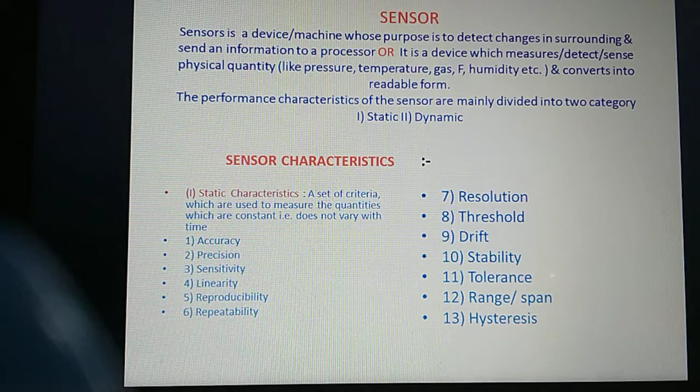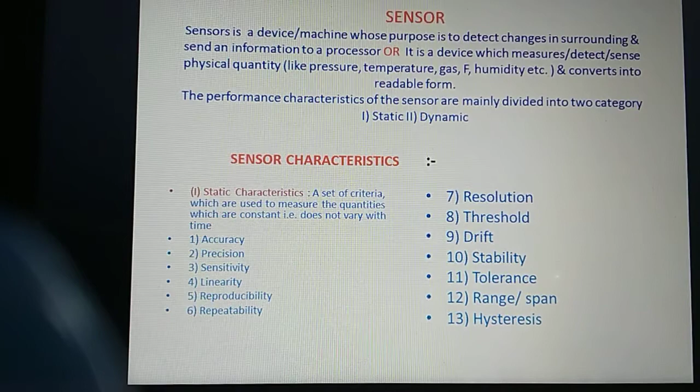Hey, good morning, students. Let us start today the next topic of the first module, and that is sensor. Last time we studied signal analysis in two domains, time domain and frequency domain, in the first lecture. Before starting the topic of sensor, let me recap the last lecture.

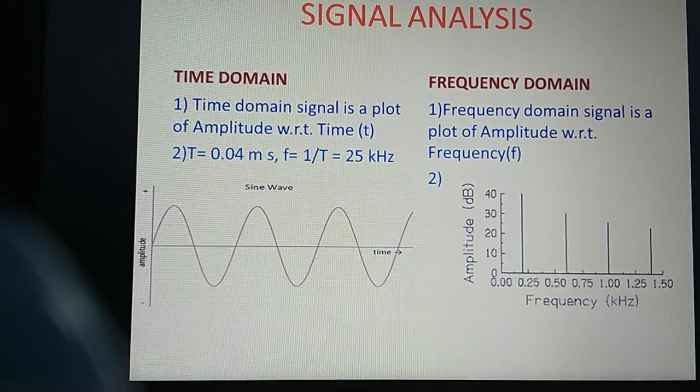In signal analysis, we studied how to differentiate the signal in time domain and frequency domain, and how the signal becomes less complex, or the complexity of the signal is reduced, in frequency domain.

The next topic we studied is signal to noise ratio, and we defined what is meant by noise. Noise is an unwanted signal or disturbance existing in the signal. Signal to noise ratio is a ratio of average signal power to average noise power, and hence can be written as signal power divided by noise power.

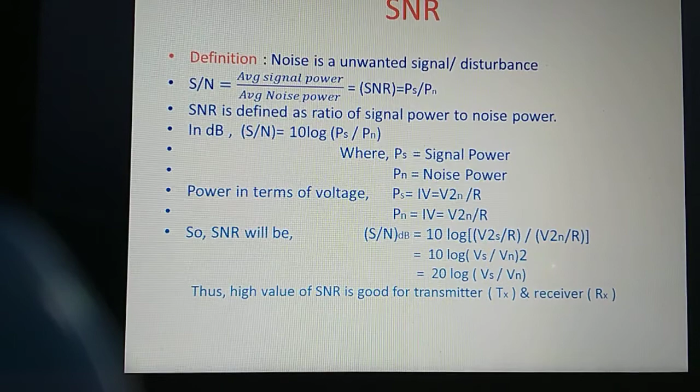We also wrote signal to noise ratio in terms of voltage, and if converted into decibels, signal to noise ratio equals 10 log of signal power divided by noise power. Then we converted it in terms of voltage, so signal to noise ratio in decibels in terms of voltage comes out to be 20 log of signal voltage divided by noise voltage. Finally, we studied that a high value of signal to noise ratio is good for transmitter and receiver.

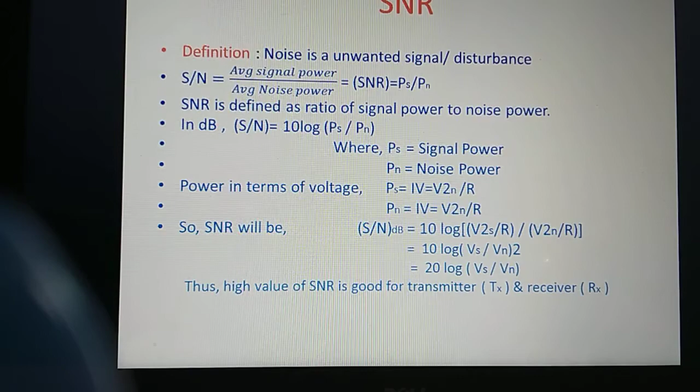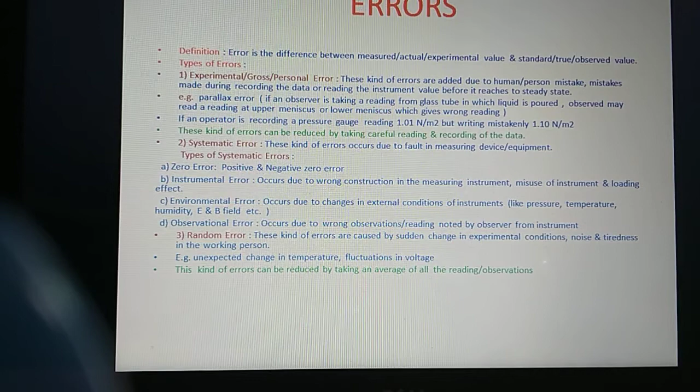After that we studied what is meant by errors, and there are three different types of error. Error is nothing but the difference between measured value and observed value, or true value.

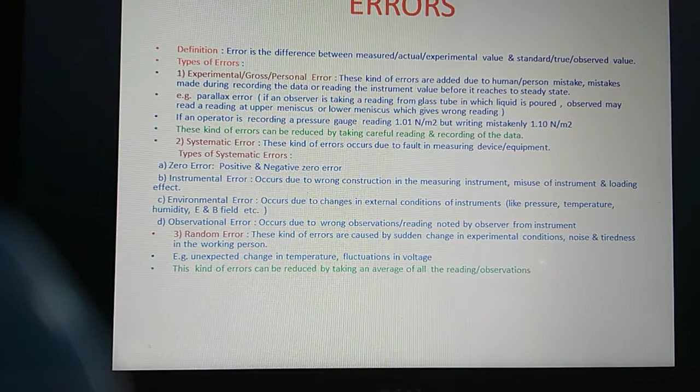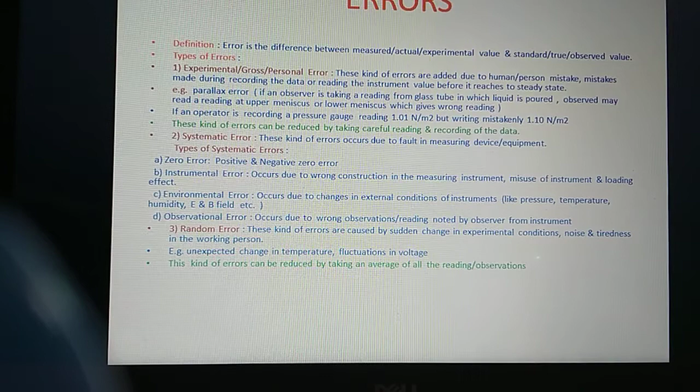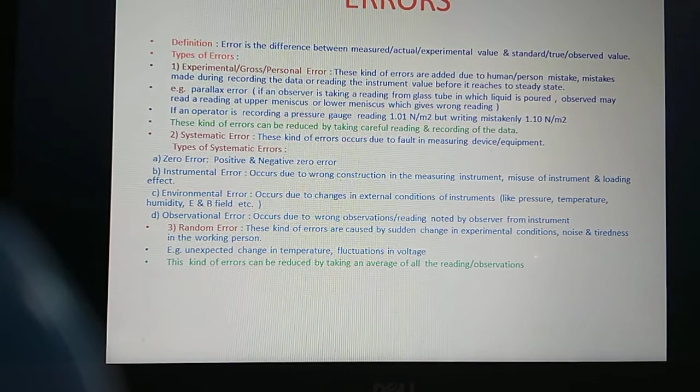The first type of error is called experimental error, or gross error, or personal error. We studied how these experimental or personal errors are introduced while doing an experiment, with an example, and how we can reduce personal errors.

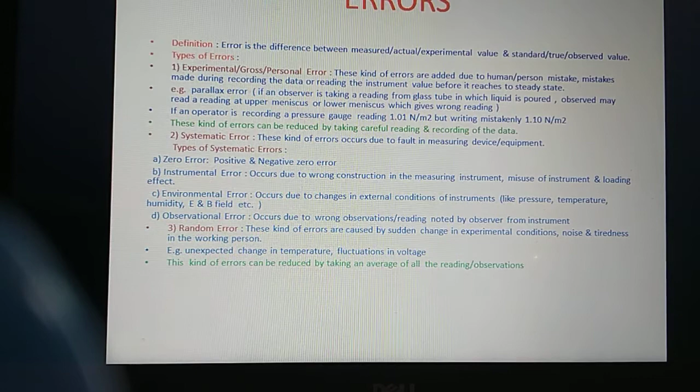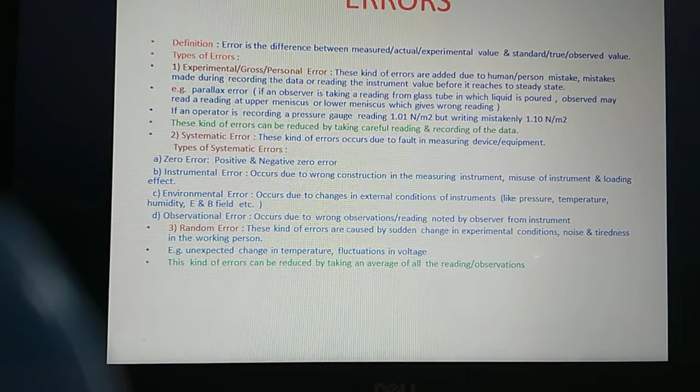After that we studied three to four types of systematic error. The first type is zero error, of two kinds, positive zero error and negative zero error. The second type of systematic error is instrumental error. The third is environmental error, and the fourth is observational error.

We studied how these errors occur during an observation, and the last type of error we studied is random error, and how to reduce that random error.

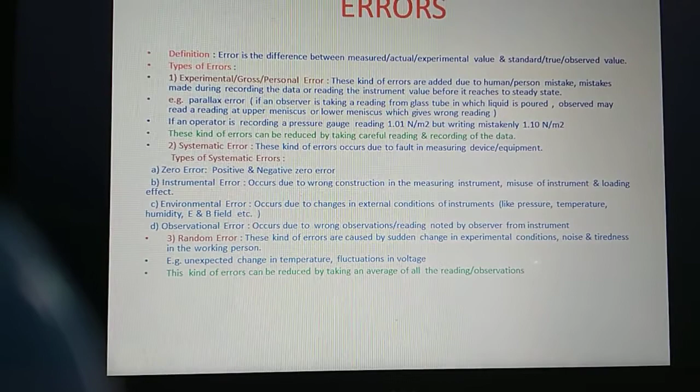After that, three different types of errors we studied: absolute error, relative error and percentage error. I hope you have understood these types also very well.

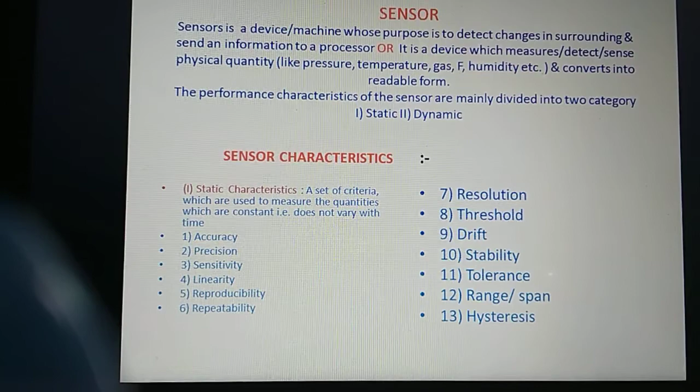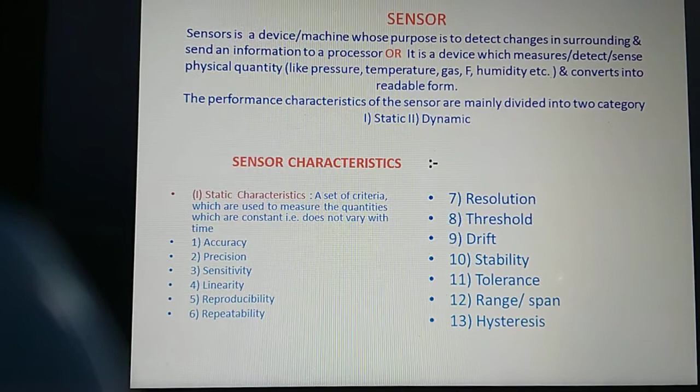Now let's go ahead with sensor. What do you mean by sensor? You have been using these sensors in your day-to-day life. Whenever you visit various malls, you will find a sensor at the entry. Or anywhere you go, you can find sensors many times.

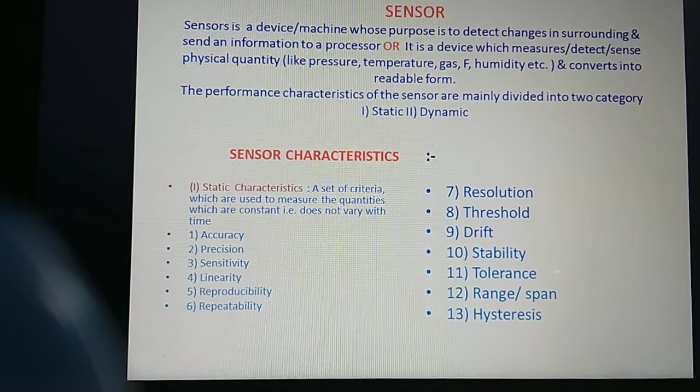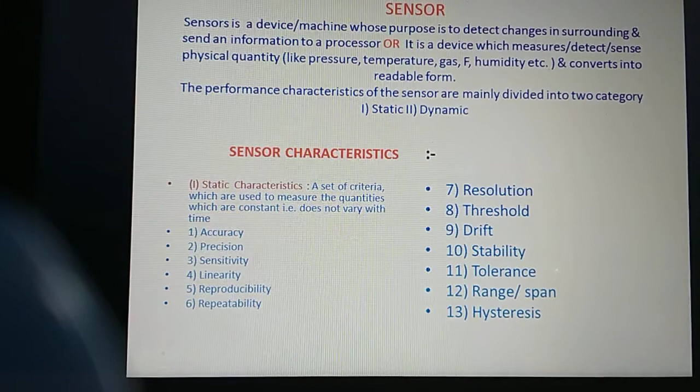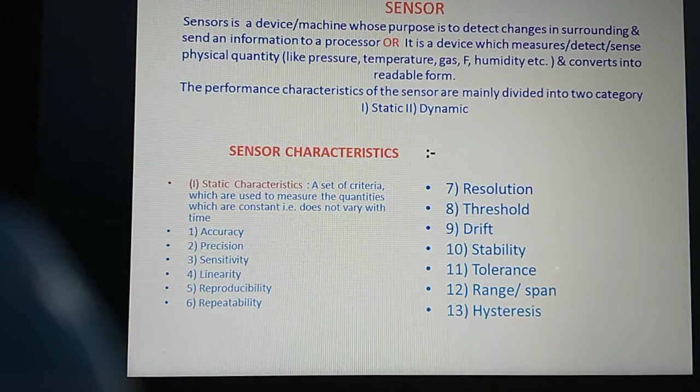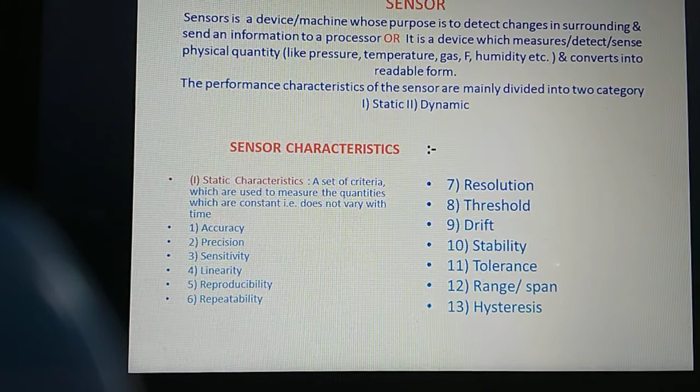A sensor is a device or machine whose main purpose is to detect changes in its surrounding, and once it detects the changes, the sensor sends that information to the processor. Or, it is a device which measures, detects or senses a physical quantity like pressure, temperature, gas, humidity, force, fluid, etc. There are various physical quantities which can be sensed using sensors, and it converts that detected or sensed physical quantity into a readable form. This is called a sensor.

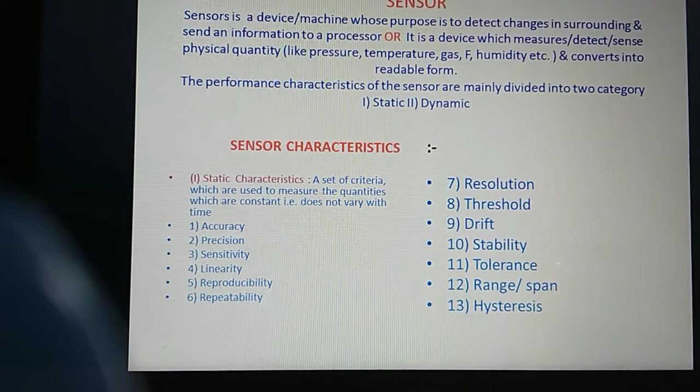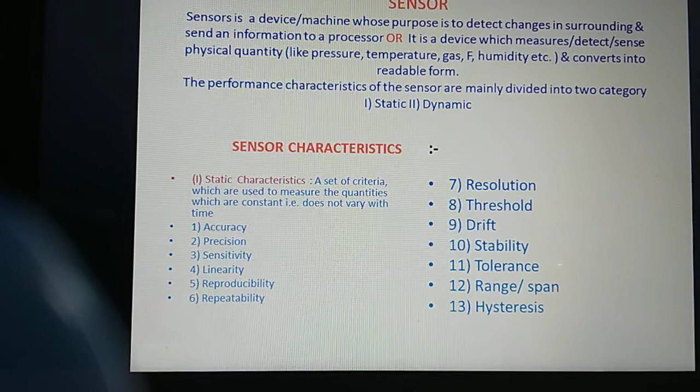Now, these sensors are used in various forms. The performance characteristics of sensors are mainly divided into two categories: the first is static performance characteristics of a sensor, and the second is dynamic performance characteristics of the sensor.

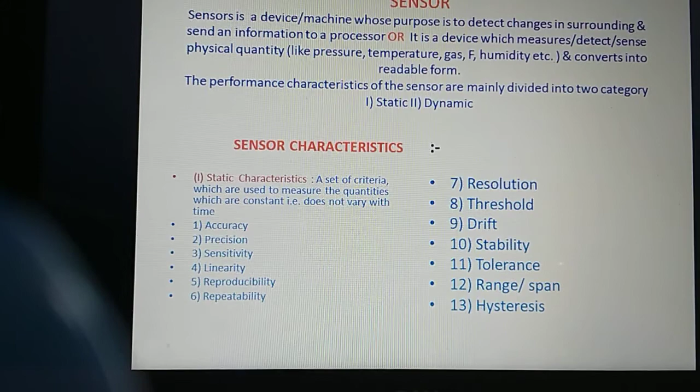Now, what do we mean by static performance characteristics of a sensor? It is nothing but a set of criteria which are used to measure a quantity which is constant, meaning it doesn't vary with respect to time. Those kinds of characteristics are called static performance characteristics of a sensor.

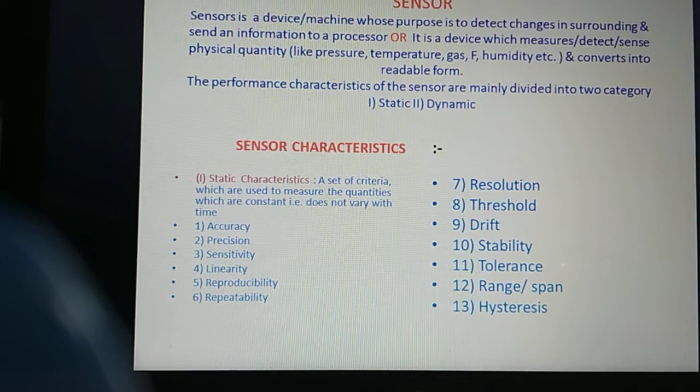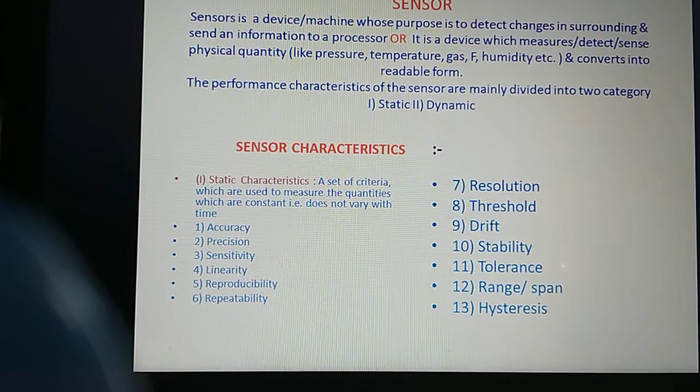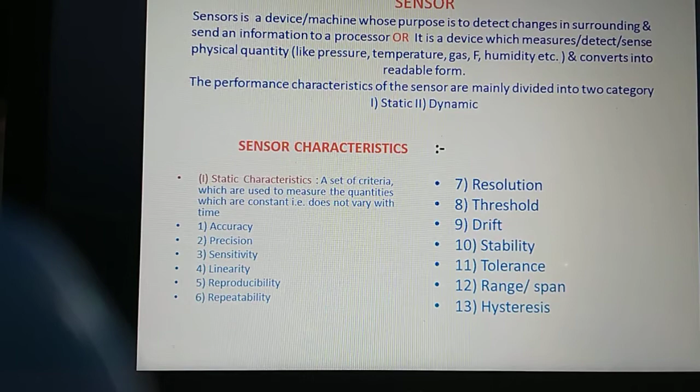There are total 13 static characteristics for a sensor. Let me list all those 13. The first is accuracy, second is precision, third is sensitivity, fourth is linearity, fifth is reproducibility, sixth is repeatability, seventh is resolution, eighth is threshold, ninth is drift, 10th is stability, 11th is tolerance, 12th is range or span, and 13th is hysteresis. Being a PG student, you are already familiar with its various names; by its name you can judge its characteristics.

Let's go for the very first static characteristic of a sensor, and it is accuracy. You have been using this word very commonly, and precisely you have studied also what is meant by accuracy in 11th, 12th standard or in UG also. Now, what do you mean by accuracy or accurate? If your answer to any problem is close to your known answer, then that answer is said to be very accurate.

If it is exactly equal, then it is an accurate answer. We commonly use this word, and the same thing is used in case of a sensor's accuracy here also.

Now let us study what is the accuracy of a sensor. Accuracy is the degree of closeness of a measured or calculated value to its actual value, or a standard value, or a true value. Once the sensor is designed and manufactured, that means it has a standard value or actual value.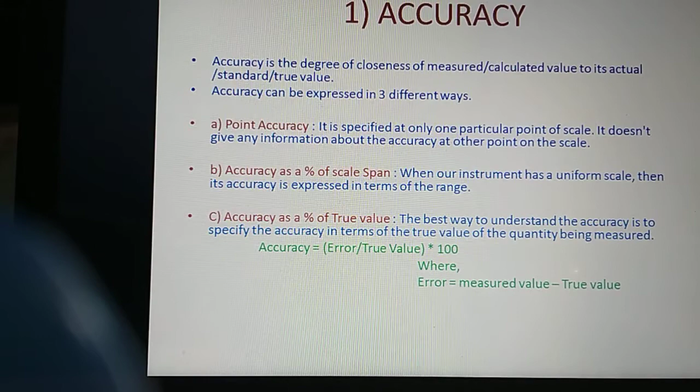And once the sensor measures a particular physical quantity, and if that measured value is very close to the actual value, then its measurement is called very accurate. Therefore we can say accuracy is the degree of closeness of a measured value or a calculated value.

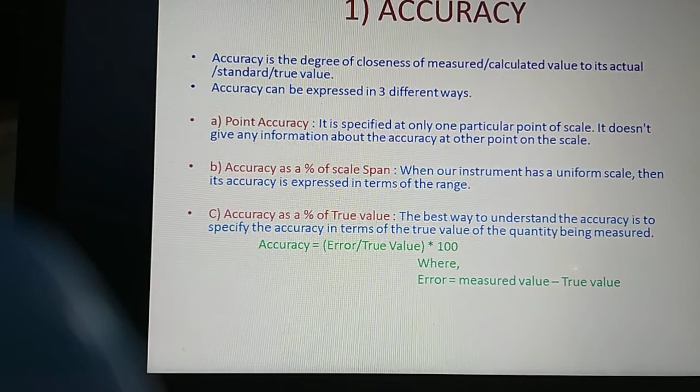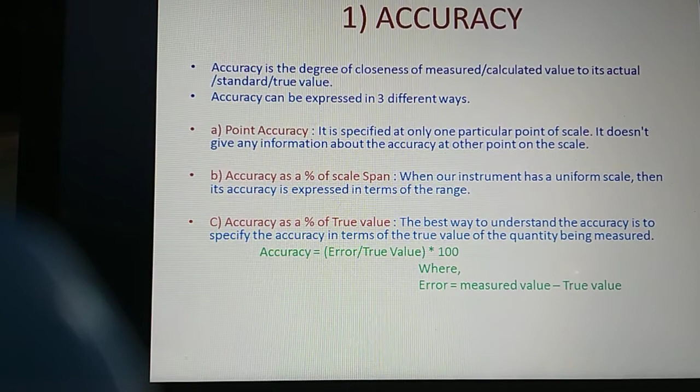This accuracy in case of a sensor is expressed in three different ways. The first way of expressing the accuracy of a sensor is the point accuracy, and this point accuracy is specified at only one particular point of the scale, and it doesn't give any information about the accuracy of other points on the scale.

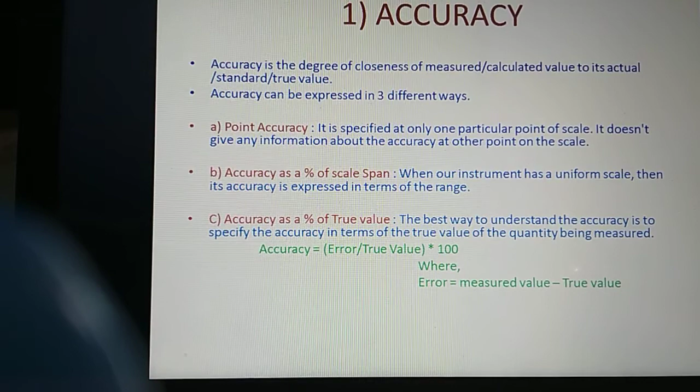The other way of expressing the accuracy of a sensor is accuracy as a percent of scale span. When an instrument has a uniform scale, its accuracy is expressed in terms of a range. Suppose you are having an ammeter whose range is 0 to 100 ampere, then the scale span is from 0 to 100. That's the meaning of accuracy as a percent of the scale span.

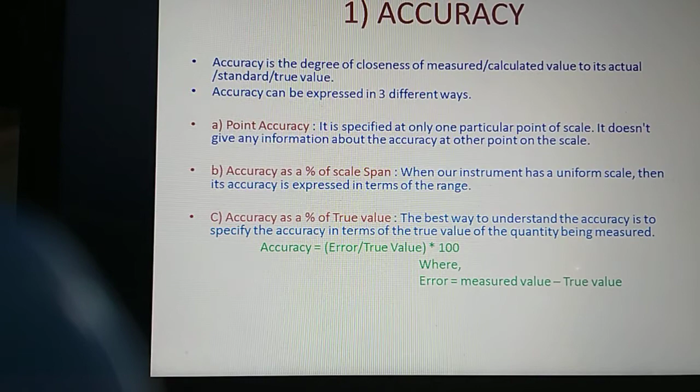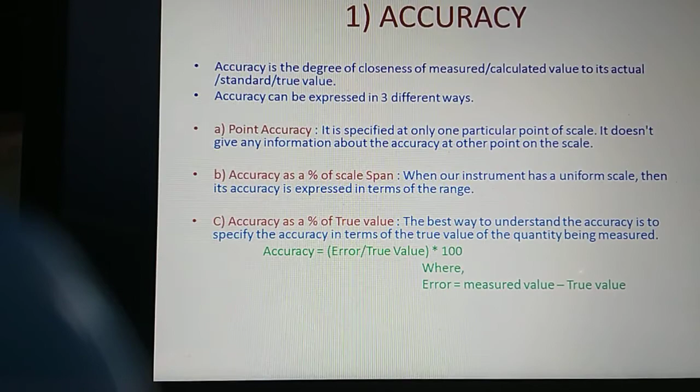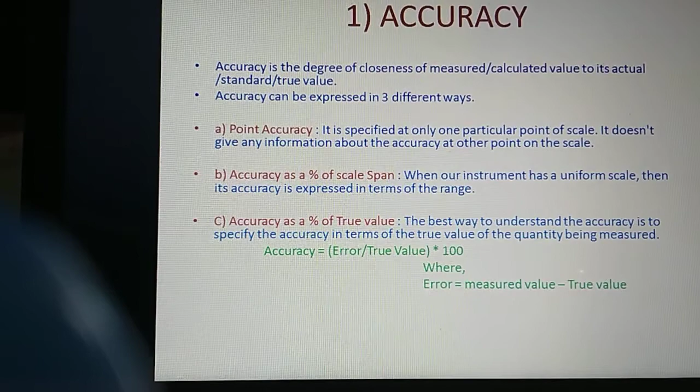Now the third way of expressing the accuracy of a sensor is accuracy as a percent of true value. The best way to understand accuracy is to specify it in terms of a true value of the quantity being measured, and therefore accuracy equals error divided by true value into 100. That gives you the accuracy, where error is the mod of measured value minus true value, which we have already studied in the error topic.

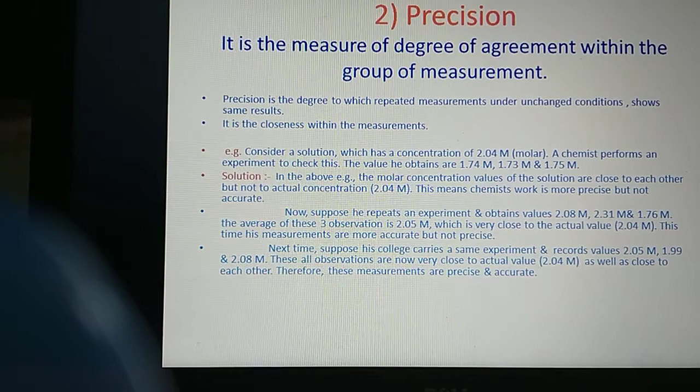Now let's move to the next static characteristic of a sensor, which is precision. We know precision is the measure of degree of agreement within a group of measurements. Let me explain a bit more clearly, and we'll study an example so you can understand precision clearly. Precision is the degree to which repeated measurements under unchanged conditions show the same results, and this precision is the closeness within the measurements.

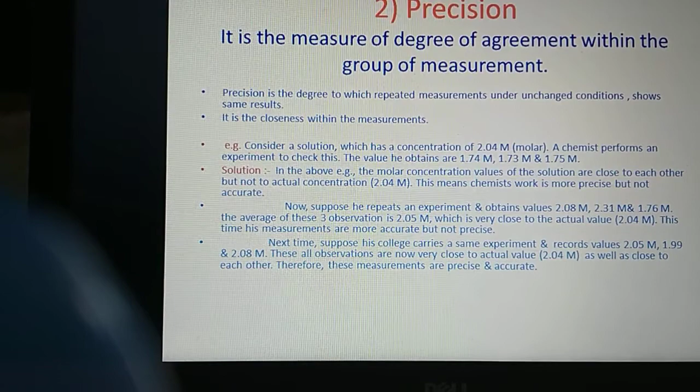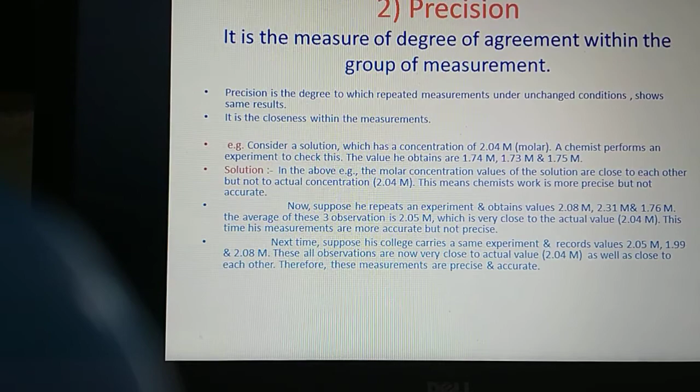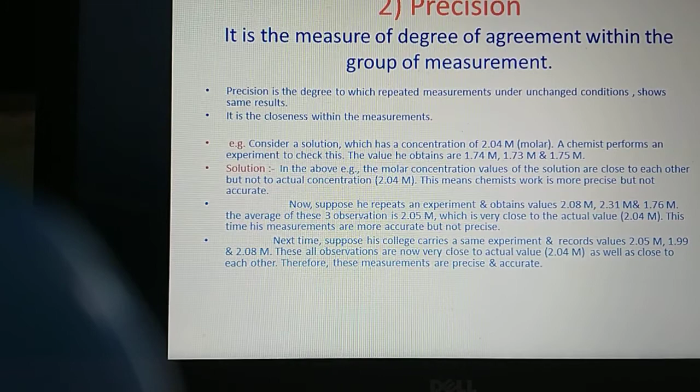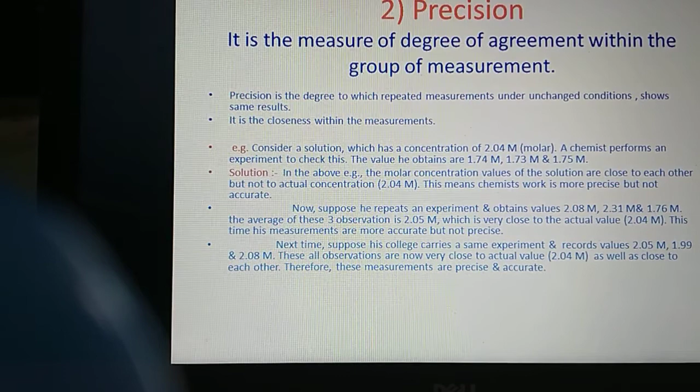Now let us consider an example. Suppose you have a solution with a concentration of 2.04 molar. Now if a chemist performs an experiment to check whether the concentration's molarity is 2.04 or not, the values he obtains after performing the experiment are 1.74 molar, 1.73 molar, and 1.75 molar.

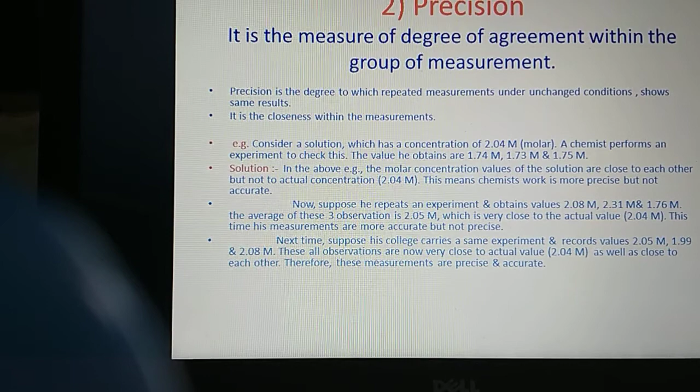Now in this example we have to understand the difference between accuracy and precision. The molar concentration values of the solutions are close to each other: 1.74, 1.73, 1.75. All three observed values by the chemist are very close to each other.

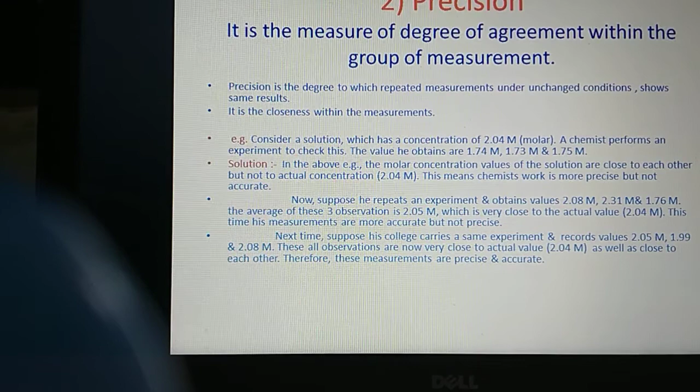But those are not close to the actual concentration mentioned in the problem, which is 2.04 molar, somewhat far away from the observed readings. This means the chemist's work is more precise but not accurate, because the values observed are somewhat far away from 2.04.

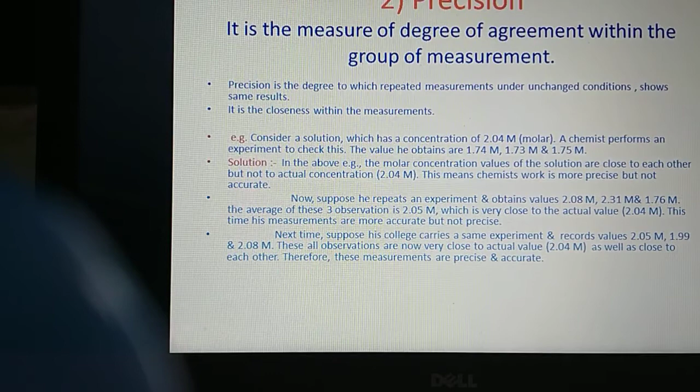But all three measured values are very close to each other: 1.74, 1.73, 1.75, which means those values are very precise. That means the chemist's work is precise but not accurate.

Now let us suppose another case of the same example. Suppose the same chemist repeats the experiment and obtains the concentration values 2.08 molar, 2.31 molar, and 1.76 molar. The average of these three observations is 2.05 molar.

This average of the observations, 2.05 molar, is very close now to the actual value, which is 2.04 molar. Since 2.04 and 2.05 are very close to each other, this measurement, performed the second time by the chemist, is more accurate but not precise.

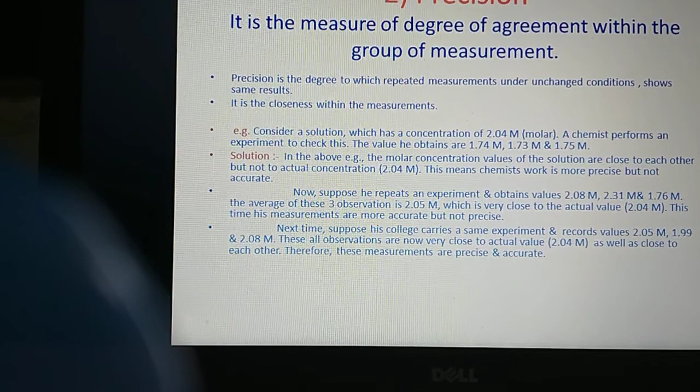Why is it not precise now? Because the observed three readings, 2.08, 2.31, and 1.76, are not close to the original value of 2.04. But the average calculated, 2.05, is very close to the actual concentration, and hence it is more accurate but not precise.

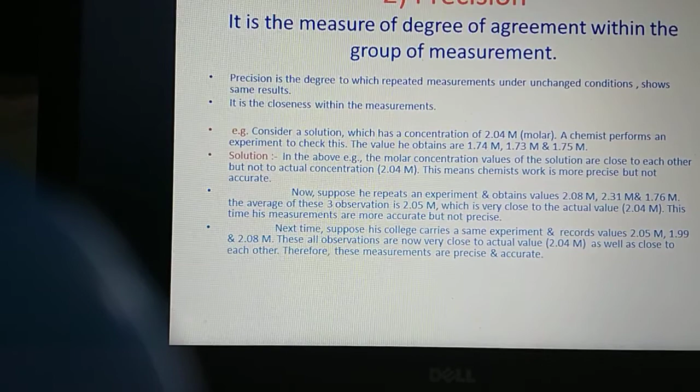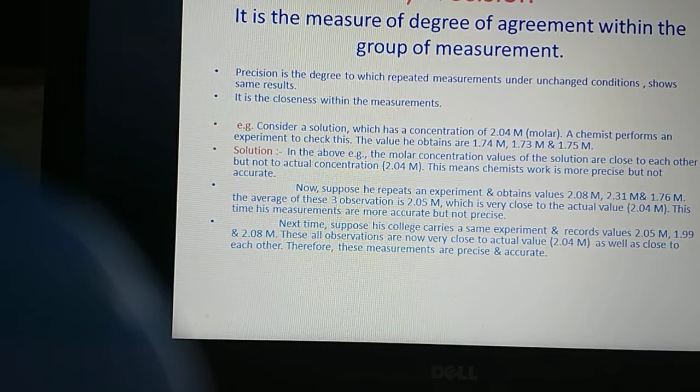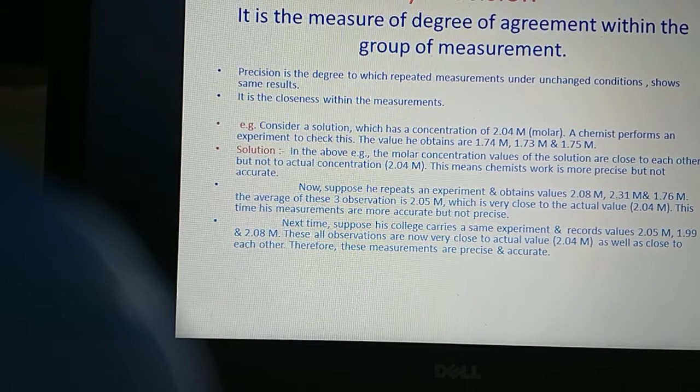Now let's try to understand more clearly by considering one more case. Next, the chemist performs the experiment with the help of his colleague and records the concentration values 2.05 molar, 1.99 molar, and 2.08 molar. Now all three observations are very close to the actual value 2.04 molar as well as close to each other.

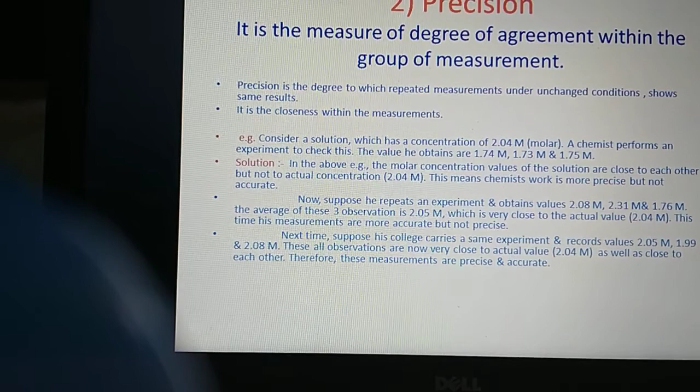Therefore, the third case is more precise than the earlier two, as well as more accurate, because all three readings are close to 2.04 molar and also very close to each other. Therefore, the third case, in which the chemist performs the experiment with the help of his colleague, is more accurate and more precise.

Hope you have understood the difference between preciseness and accuracy with this example. Now let us go ahead for the next static characteristic of the sensor, which is sensitivity.

And what do you mean by sensitivity? We all know by common sense you can easily judge what is meant by sensitivity. We are using this word commonly. You are very sensitive, that means you are giving a very quick response to whatever you receive from the next person or from your friends.

Like that, the meaning of sensitivity for the sensor is also the same. The sensitivity of the sensor is defined as the quickest response of an instrument to a smallest change in the measured variable or any physical quantity. Sensitivity equals the ratio of change in output of an instrument to the change in value of the quantity to be measured, or sensitivity equals change in output divided by change in input. Now if the response curve is linear, then sensitivity is said to be good.

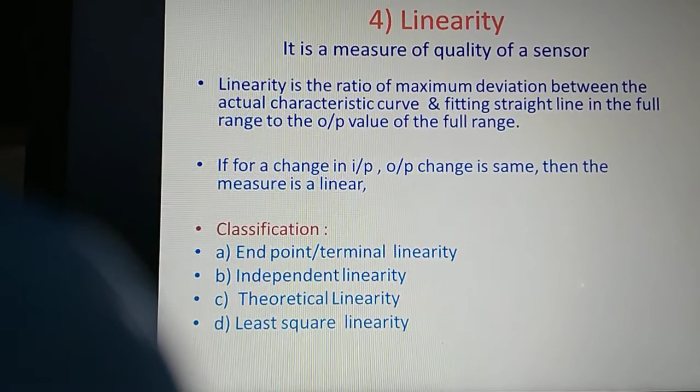Now let's go for the next static characteristic of the sensor, which is linearity. What do you mean by linearity? This linearity of the sensor is a measure of the quality of the sensor.

Linearity is the ratio of maximum deviation between the actual characteristic curve and the fitting straight line in the full range, to the output value of the full range. If for a change in input the output change is the same, then the measure is linear, like a linear curve or linear graph. If the input and outputs correspond in this way, then the measure is said to be linear.

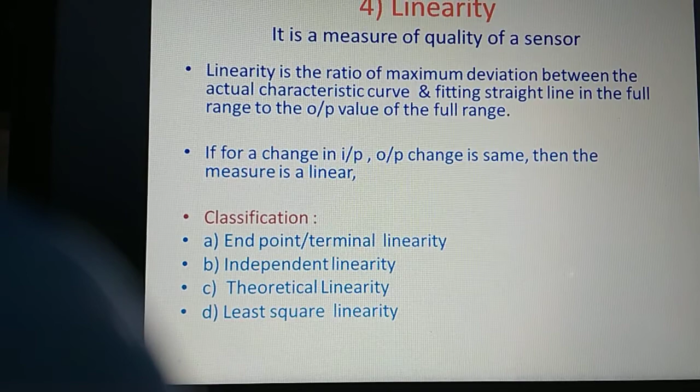This linearity of the sensor is classified into 4 different ways, which I have mentioned on the screen. The first classification is endpoint or terminal linearity. Second is independent linearity. Third is theoretical linearity, and fourth is least square linearity. These are the four different ways of classification of linearity.

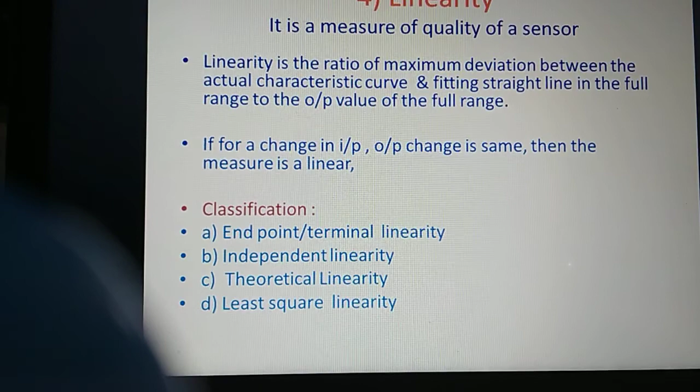We are not going into the details of classification of linearity. You can read out the classification of linearity yourself. That is not important as far as your exam is concerned. Now the next static characteristic of the sensor is repeatability.

What is meant by this repeatability? It is like repeating the observations or measurements of an experiment, called repeatability. The same thing applies here in case of a sensor.

Repeatability of a sensor is its ability to reproduce a group of measurements. That means the sensor gives you again various measurements, or a group of measurements, of the same input under the same operating condition. That is called repeatability.

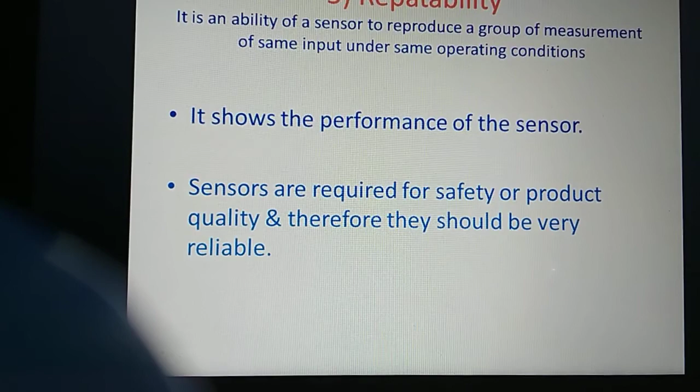That means if you fitted your sensor somewhere for a particular operating condition, say a particular temperature of the room, and you want to repeat those observations, the sensor has an ability to reproduce those measured values again with the same input and same operating or surrounding conditions. That is called repeatability, and it shows the performance of the sensor.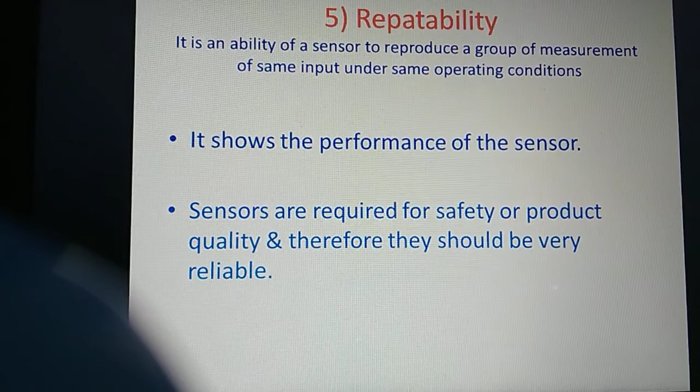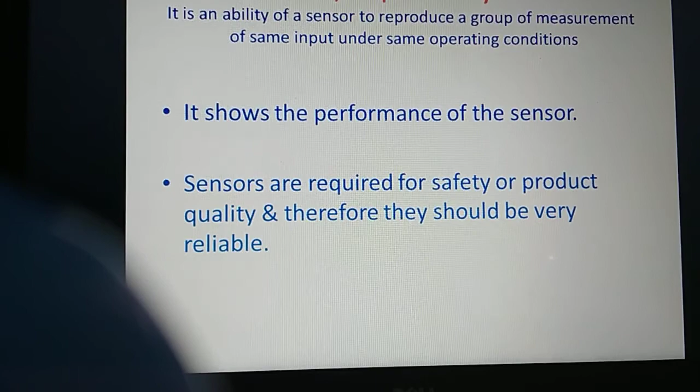If a particular sensor is repeating a group of measurements again with the same input value and operating conditions, that means the sensor is good. Sensors are required for safety or product quality, and therefore they should be very reliable.

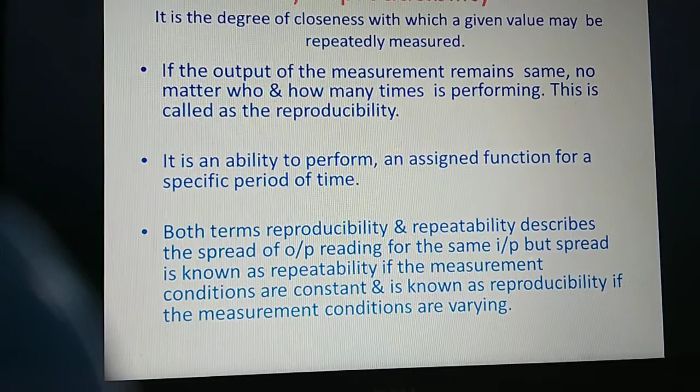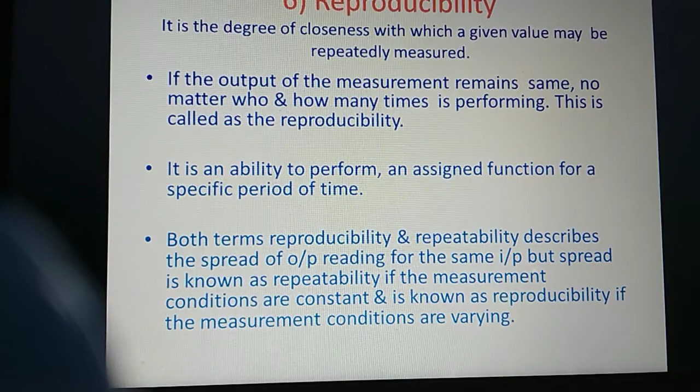The next static characteristic of the sensor is reproducibility, which is nothing but the degree of closeness with which a given value may be repeatedly measured. If the output of the measurement remains the same no matter who performs the experiment and how many times, this is called reproducibility.

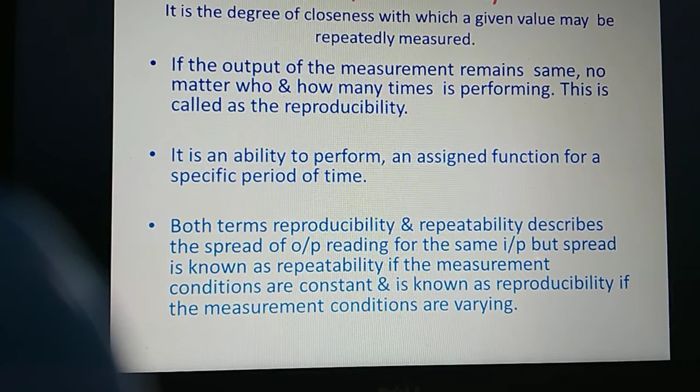It is an ability to perform an assigned function for a specific period of time. Now both terms, reproducibility and repeatability, describe the spread of output readings for the same input, but the spread is known as repeatability if measurement conditions are constant, and is known as reproducibility if the measurement conditions are varying.